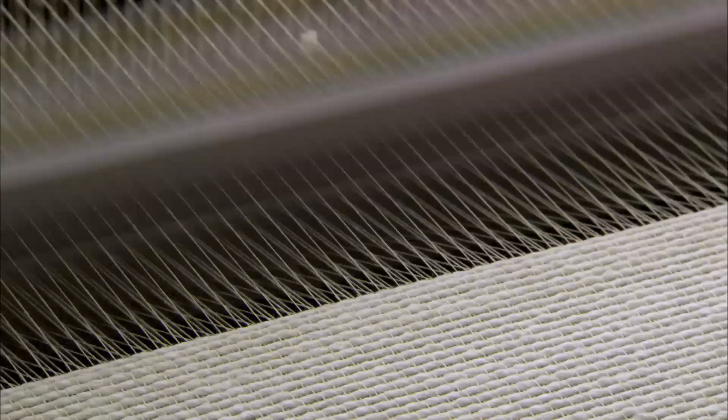Ever look really closely at the fabric on your sleeve? See the pattern, the weave, and the texture. The high-speed loom does it all.

Look over your shoulder. A silent spy may be tracking you. The micro drone has moved up from amateur to professional.

It's a monster lumberjack. Grab, slice, and stack a bunch at a time. Meet the Feller Buncher. A low-level rescue flight over water, rocks, and land.

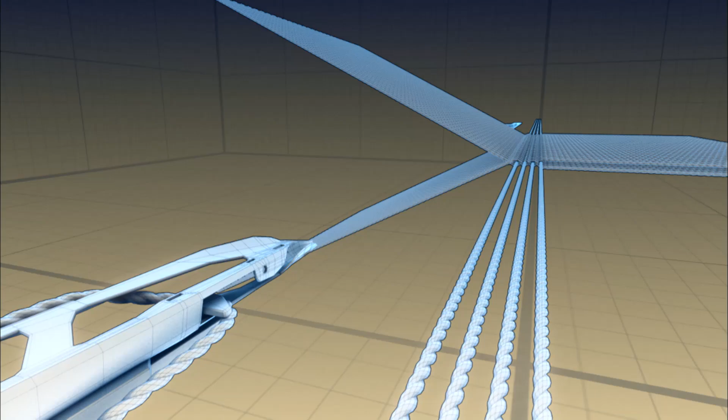Speed, turn, stop on command. It's the sports car of hovercrafts. Let's look inside these machines and see how they work.

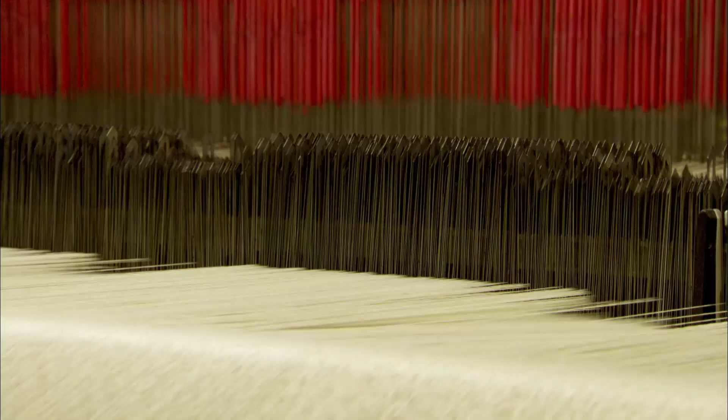Weaving has been around since the early Stone Age. The basic concept hasn't changed, but speed and sophistication sure have. To keep us all in clothes and bed sheets, we need millions of kilometers of fabric every year. Impossible without the industrial loom.

High-speed machines all over the world, like these outside Leeds, England, produce just about anything we need and want. Let's see how they work.

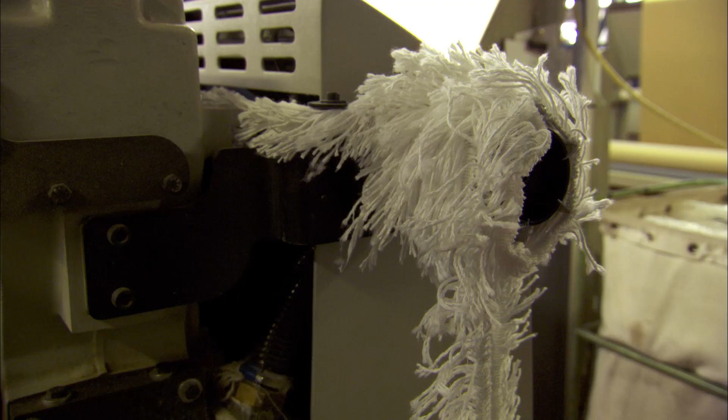First up, the basics. Take 2 sets of threads. The first is called the warp, 2 rows stretched lengthwise. The second set is called the weft, and it goes back and forth between the warp. Every time it goes through, the warp moves to trap the weft.

The threads are now becoming a piece of fabric. To keep it from unraveling, a reed pushes the threads together. And then, the whole process starts again.

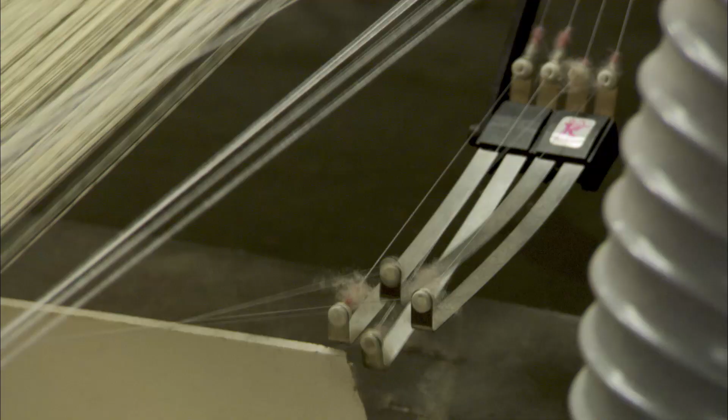To mass produce a wide range of fabrics, you need to organize thousands of different threads. So the loom needs a lot of control, and it gets it from these devices called heddles. Each one has an eye through which individual warps are threaded. This gives the machine control of thread movement.

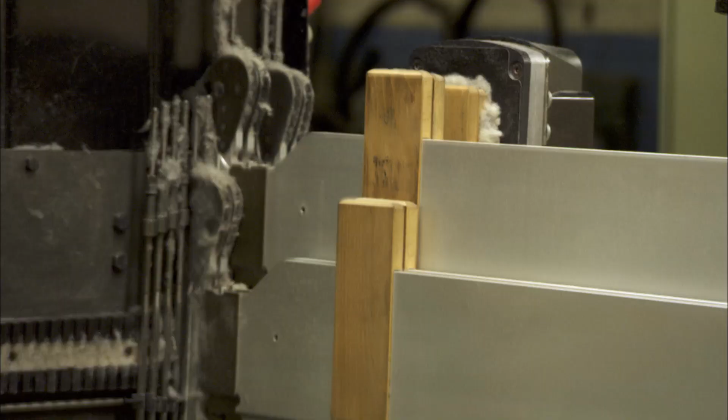Heddles are suspended on the loom's shafts, located here. When a shaft is raised, the heddles go up and the threads with them. To create simple patterns on one of these, you need a few hundred heddles and 2 shafts moving up and down together.

Industrial looms have thousands of heddles and up to 24 shafts, all moving independently. That takes care of control. Now let's see how speed works on this machine.

To manufacture massive amounts of fabric in a cost-effective manner, the loom needs to rocket the weft through the warp. Old-style looms use a shuttle, a spool of thread that unravels as it moves manually back and forth. Reliable, but slow and in constant need of reloads.

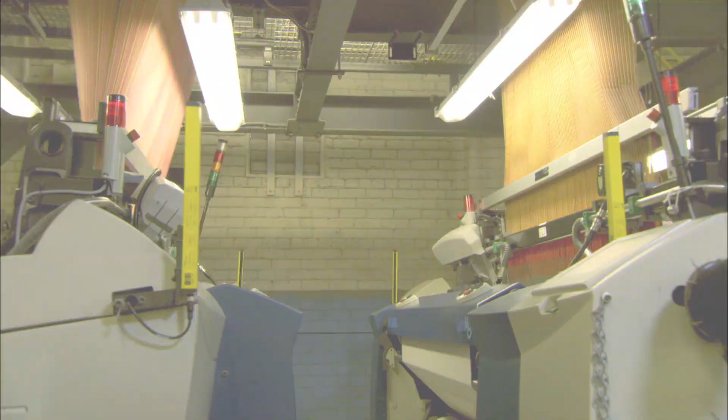This presents 2 challenges for the modern loom: how to weave thread quickly without a shuttle and spool, and how to minimize thread reloading. Enter the rapiers, one of the latest shuttle replacements.

One rapier picks up a piece of thread, pulls it to the middle of the warp, and hands it off to its partner. It pulls the thread the rest of the way, while the first goes back for another strand. And because spools no longer have to travel back and forth, the rapiers draw thread from large bobbins.

That means a lot fewer pauses for reloading, and this dramatically improves the machine's productivity. On the industrial loom, this handoff happens over 1,000 times a minute.

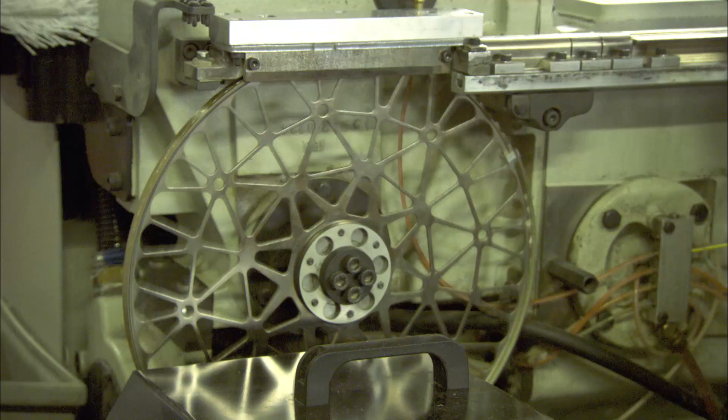This speed puts tremendous strain on thread snatched off bobbins at up to 250 kilometers per hour. If it breaks, the machine shuts down, and that costs money.

So experts came up with a pre-winder, a device that preps thread for the rapier. It's a buffer that eliminates thread-breaking tension on the machine.

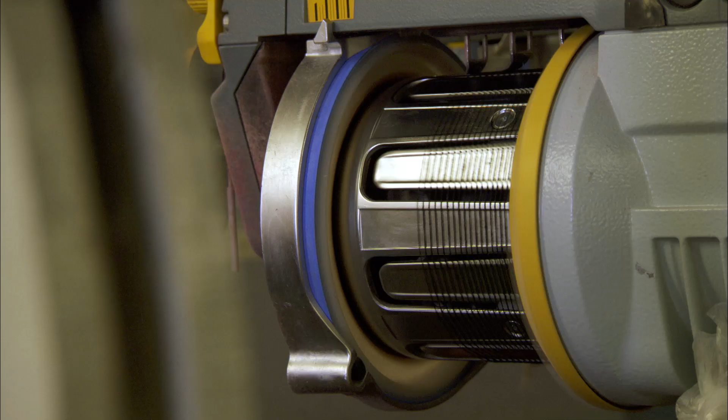Another side effect of speed is fabric dust, and to protect workers, it's got to go. Ceiling-mounted vacuums suck up the entire volume of air from the shop every 2 minutes.

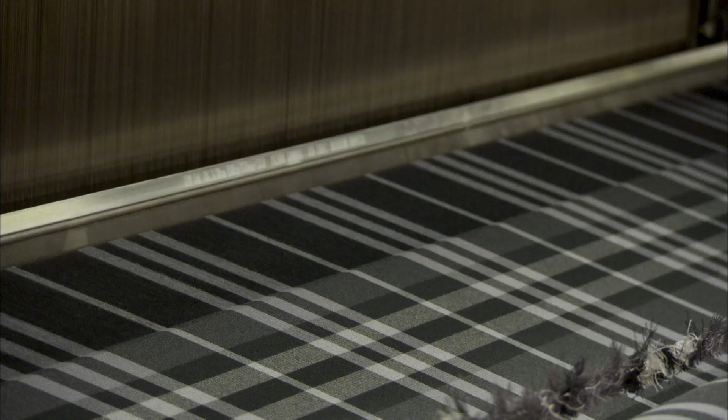Okay, the loom is lightning fast, but how does it create different patterns and textures? A geometric pattern, like this plaid, starts with loading the warp with rows of different colored thread. Send a dark thread through the colored rows, you get this. Send a light thread across, you get this.

The trick is switching between colors on the fly, and for that, it needs a weft presenter, a component that selects different colors from bobbins and hands them off to the rapiers while they work.

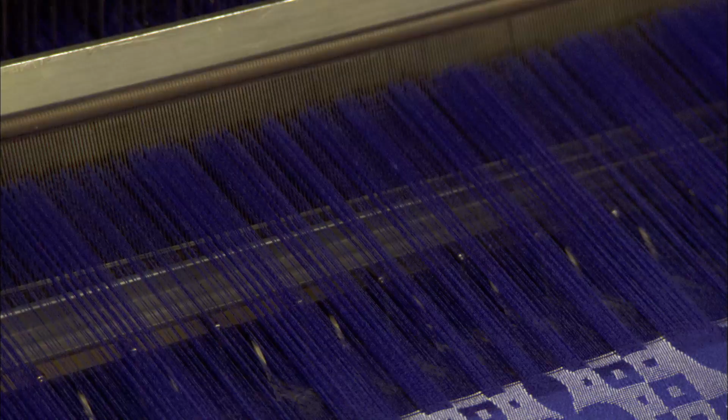For complex patterns, a loom with a jacquard attachment is required. It's a mechanical wonder. The jacquard device controls all the threads loaded into the machine. Instead of ganging them together onto the shafts of a standard loom, every strand has its own control system. So, with a jacquard attachment, operators can control the paths of each thread into ornate designs.

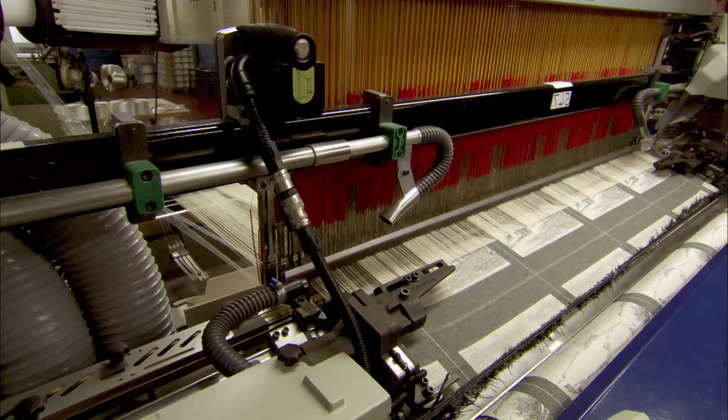Instructions are sent to each individual thread as it races through thousands of weaves. All those tiny decisions add up to a pattern, kind of like how a bunch of pixels become a picture.

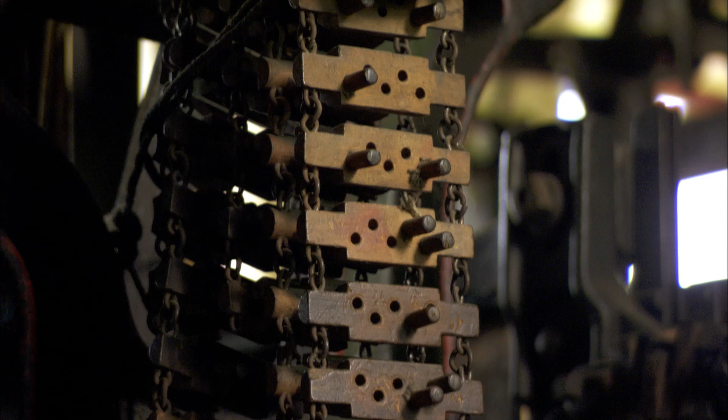Its namesake, Joseph Marie Jacquard, invented the first of these mechanical marvels in 1801. Until then, this kind of work had to be done by hand and was extremely expensive. His machine used punch cards to control individual threads, and some consider it the first computer ever built.

Which is exactly how its modern descendant works, only electronically. Designs and patterns are programmed into the machine, and away it goes.

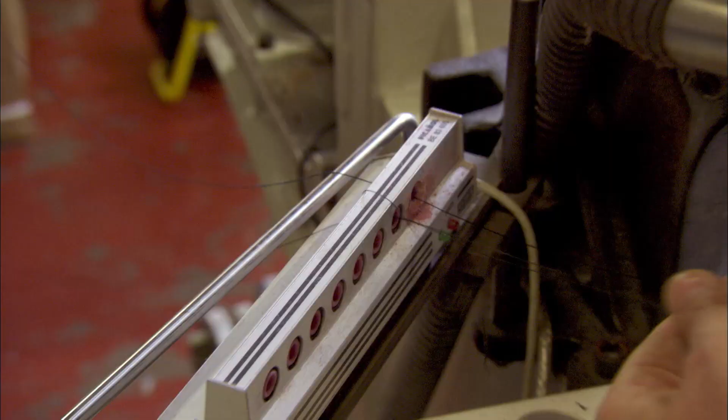The threading of a jacquard loom is so labor-intensive, it's usually done just once. When it's time to change colors, new threads are tied on to the existing ones. Even for a small loom with only a few thousand ends, the process can take days.

Without these fabric workhorses, the cost of a single suit would leave most of us in last year's deerskin. The loom's a machine to be thankful for. It literally puts the clothes on your back.

This is a hovering, unmanned aerial vehicle. The micro-drone MD4-200.

Drones like this one are used for jobs like aerial mapping, fire inspection, law enforcement, surveillance, and search and rescue. Weighing less than a kilogram, its onboard camera records from a height of 150 meters.

It's an eye in the sky that saves money and lives. Let's see how it works. The MD4 flies with the help of 4 fixed-pitch rotors, each attached to an electric motor. You start it up, spin the blades, and up it goes.

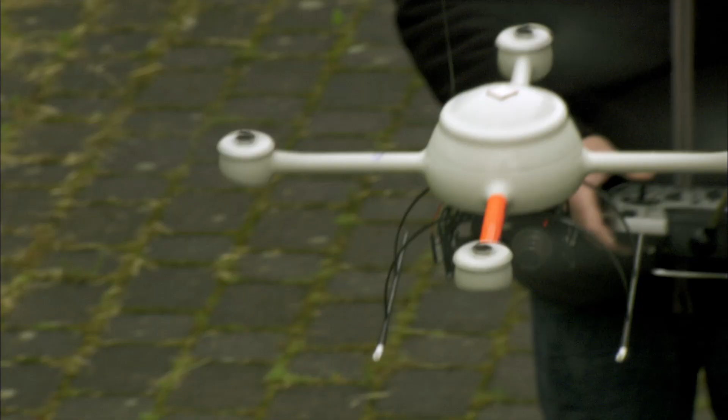The design challenge is to keep the craft super light and whisper quiet, airborne and stable, all while transporting an HD camera. And to avoid losing it, program it to come home on its own when low on power, and land safely. When you tip the scales at less than a kilo, you don't need a big engine. That means less energy to fly and hardly any noise.

To keep it light, designers chose carbon fiber for the MD4's body. A material born in the lab, made up of thin threads of carbon atoms in a hexagonal pattern. Weave it into fabric, create lightweight material with tons of strength.

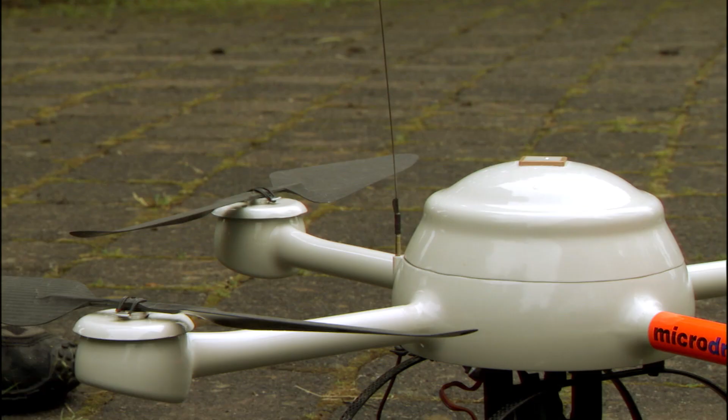Small brushless motors give the machine lift. All electric, without gears, the motors have more than enough power to fly the MD4. The 4-rotor platform keeps a horizontal and stable base in balance for taking pictures.

That's the good news. But flying a quad rotor isn't like working a plane or a helicopter. 4 rotors means 4 sources of thrust, each needing constant adjustment.

The motors are independently controlled by microprocessors that send and receive hundreds of signals to onboard sensors. The operator talks with the drone through a controller, sending FM radio signals that the MD4 converts into movement.

To get a rock-steady hover, 2 rotors spin in one direction, the other 2 in the opposite. The 2 sets of rotors cancel each other out and keep the machine in a static position. If you drop the speed of one pair of rotors, the torque of the other 2 force the drone to spin.

For a straight run, drop the speed of one rotor, which causes the leading edge to dip. Then you bump up power on the back rotor, and away you go.

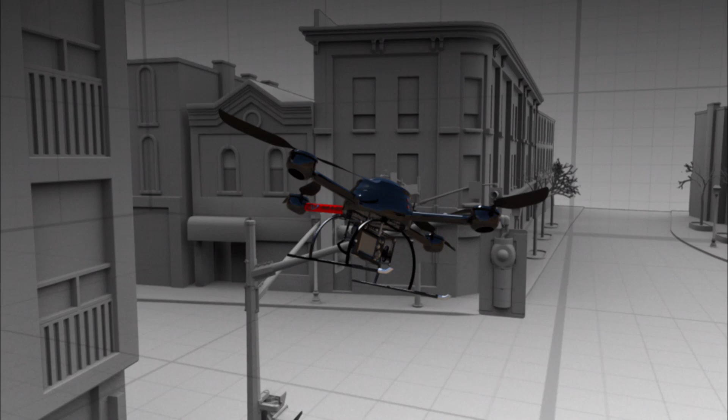The machine gets all its power from a small rechargeable lithium battery, enough juice to keep it working for about 30 minutes.

If the battery runs low during flight, sensors give the drone a pre-programmed flight plan to land it safely close to the operator, who just pops in a new one and sends it up again.

And if the MD4 loses radio contact, onboard GPS puts the drone in park to wait for its master. If it doesn't pick up a signal in 30 seconds, it makes an emergency landing automatically. The GPS also allows a user to switch to autopilot for flying the machine on a predetermined route.

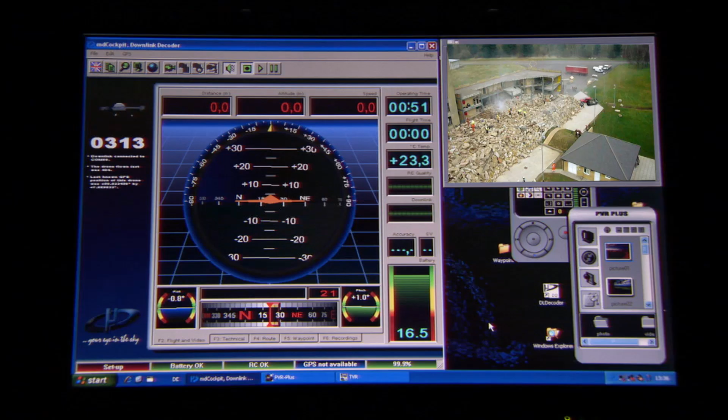These firefighters in Birmingham, England, use the MD4 to find deadly hotspots. Cops and security patrols sneak up on bad guys. And it inspects hard-to-get places for hydro crews.

Flying around in silence with the latest cameras. It's a stable, floating platform for taking pictures, thanks to the quadcopter design that keeps the shot steady for as long as the batteries allow.

If you're a softwood tree, between the ages of 50 and 80, live on a farm, and this machine shows up on your doorstep, you're in for a bad day.

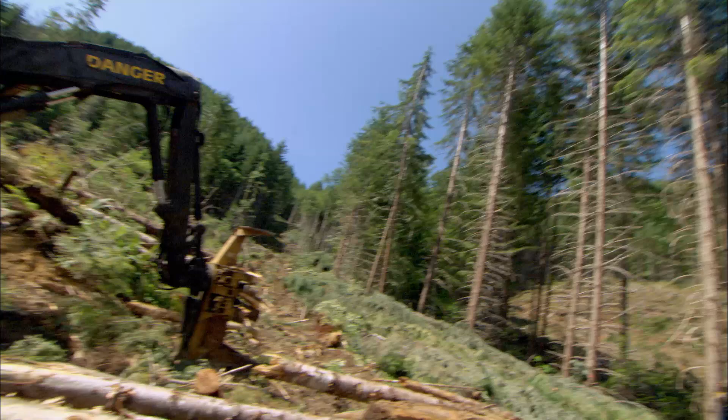This is a feller buncher, a machine that revolutionized the lumber industry. And chances are, it cut down the wood that built your house and made your morning paper.

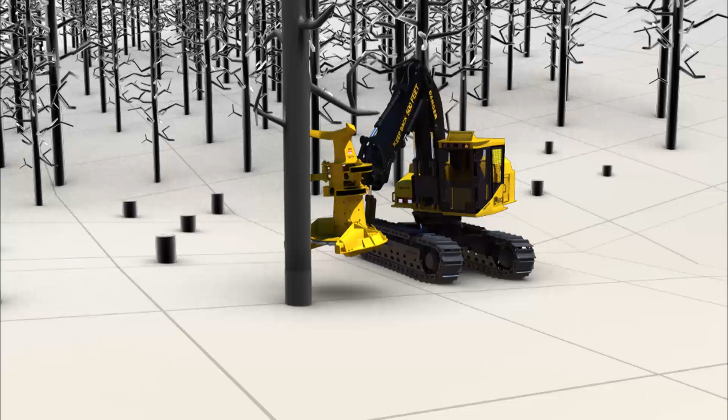It does the work of dozens of men, cutting up to 4,000 trees in a single day. One of these machines can clear about 100 football fields worth of trees in a week. All with the flick of a joystick.

Let's see how it works. The feller buncher has 2 simple jobs: felling and bunching.

Cut trees with a big saw, pick them up with a long, powerful arm, and set them down gently.

First up, the blade. The feller uses a high-speed disc saw with indents to carry away wood chips, and teeth that are wider than the disc. If disc and teeth were the same width, pressure from the tree would sandwich the blade and the whole thing would grind to a halt.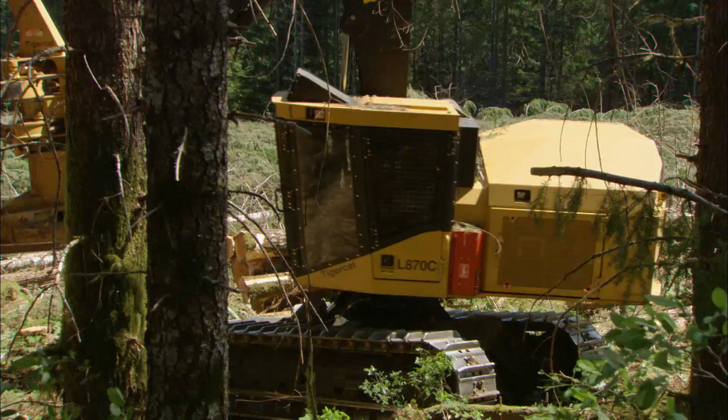The teeth are made from carbide, a super strong alloy, strong enough to rip through a half meter of dense, resin-soaked trees. The teeth cut through fibers inside the tree with these points, then rip out the weak middle section.

As the tree is cut, it slides onto this holding plate. Without it, the tree's weight would freeze the disc and burn out its motor.

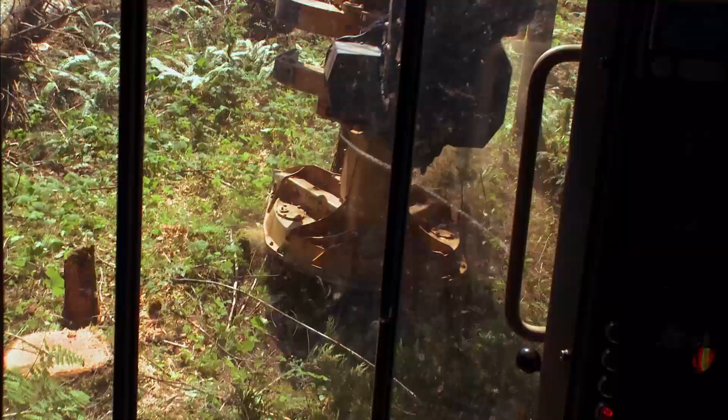Another great advantage of this machine is how low to the ground it can cut. Leaving behind big stumps wastes a lot of wood. And cutting low is more about reach than bite.

Which brings us to the bunching part of this machine and its powerful hydraulic boom. The feller buncher needs distance from the trees to give its operator a clear view for a level cut, and to keep him and the machine out of harm's way.

For that, you need a hydraulic arm that's strong enough to pick up and set down a 5-ton tree from 8 meters away.

The hydraulic arm has 2 sections, the stick boom and the main boom. Getting these to work together is the key to success out here. With a single joystick, the operator moves and adjusts the boom's 2 sections to land in the right spot and make the perfect cut.

Okay, you're through the tree. Why not just yell timber, let it go? Falling trees damage other trees. They're extremely dangerous. And out here, to be efficient, you need the wood out of the way.

And neatly stacked for transport. To do all that, you need the hydraulic boom and its claws to be powerful, and you need a body that's not going to tip over.

This machine's strong enough to grab several trees at once. After cutting, the operator closes the accumulator and hangs on while opening these clamp arms. When a second tree is cut, the accumulator arms are sandwiched between the two.

A double-hinged joint allows it to slip free and grab the harvest, while the claw is free to grab the next tree.

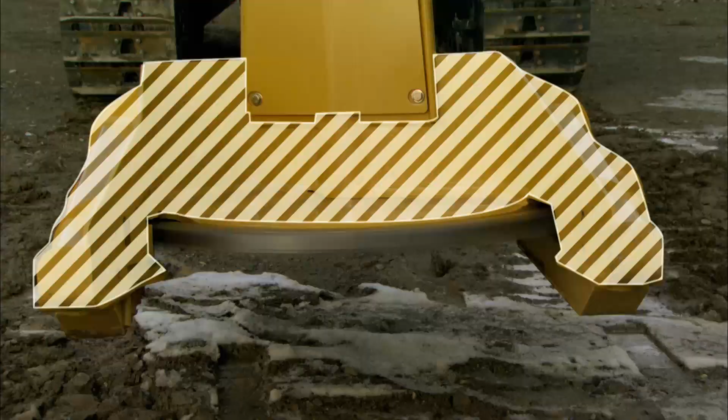Meanwhile, these special ends, called snouts, keep the blade from accidentally picking up forest debris and sending it flying off in all directions. As the claw grabs, the machine stabilizes itself.

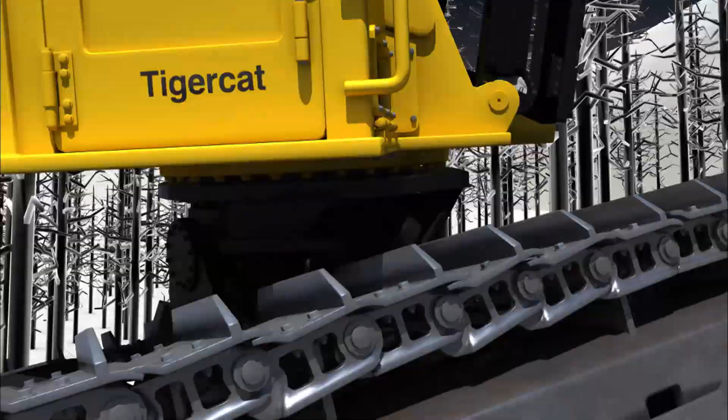It floats on a leveling system that allows the machine to bob and weave on a series of hydraulic cylinders. It's kind of wrestling with the tree as it picks it up and sets it down.

With a pivot point near the cab, most of the weight is back here. A great counterbalance to keep the whole operation upright.

This self-leveling machine operates on slopes up to 45 degrees. Handy when you're working the side of a mountain.

Its tracks provide a great grip without wrecking the forest floor. So tree farms like this one can be replanted.

The machine's 31 tons are evenly distributed over 6.5 square meters. At any point, its heaviest impact is less than 0.5 kilograms per square centimeter. That's less than the pressure you put on the ground as you walk.

When the feller buncher arrived on the logging scene in the 70s, it changed the industry forever. The old-style lumberjack is a dinosaur now, and a machine that looks like one replaced him.

You're flying over rocks, river currents, and land without a hitch. It's what hovercrafts do. The HoverTech Rescue Craft is an emergency vehicle working some rough waters in Canada's Fraser Valley.

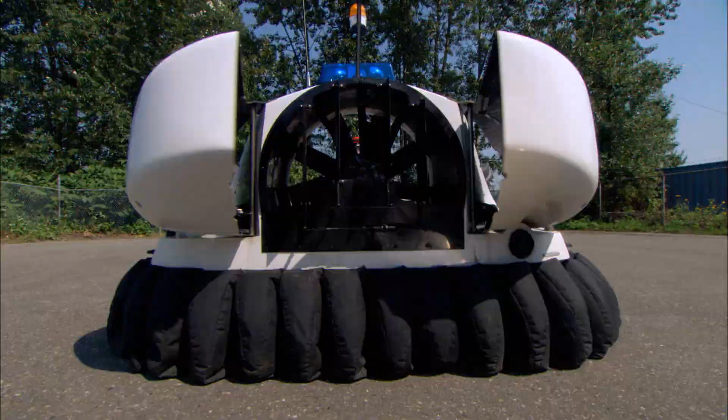When a call comes in, it's got to unload fast and launch in seconds from almost anywhere. Designers gave this machine just one fan and one motor. And that's a hovercraft rule breaker.

A traditional hover has separate fans and motors, one for lift, one for thrust. To keep it compact and light, this machine's single engine does both.

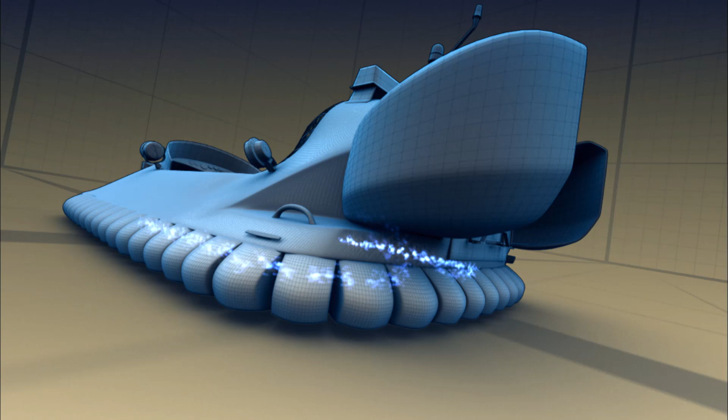Here's how it works. When you start up, the fan blows air into an airbag or skirt made from heavy-duty nylon. Air pressure builds up to the point it has to escape, and the only way out is to push the whole thing up and blast out under the skirt's pockets. You're up and floating on a cushion of air.

But you can't go forward on lift alone. At this moment, other hovercrafts need a second fan to move forward. That's because they don't have this.

A splitter that divides the fan's air, directing enough downward for lift, while sending the rest out the back for thrust.

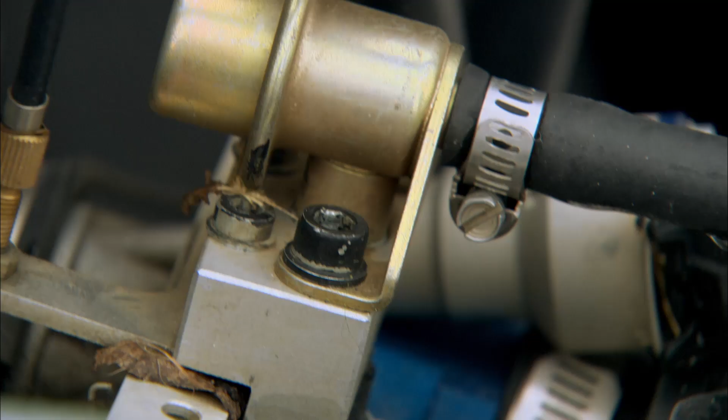When you're riding on air, there's not much friction. So all this machine needs is a 65 horsepower engine to hit a top speed of 70 kilometers per hour.

You can go just as fast on a boat like this, but you have to push water out of the way and burn a lot more gas doing it. With a hover, you're more aircraft than boat.

No current or tide can touch you. Transitioning onto land is no problem. The flexible skirt, made of individual air pockets, moves up and down with the terrain. And if one of its pockets rips, the one beside it fills the gap.

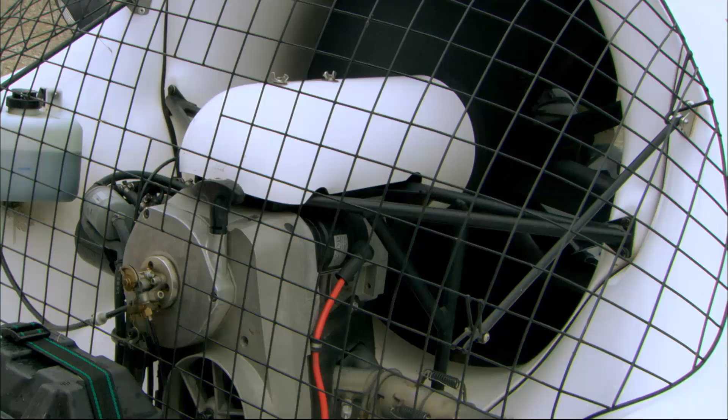A traditional hovercraft can shut its thruster fan and float on its lift fans, but with just one, it's kind of tricky. Kill that fan at full speed, you lose thrust, lift, and slam into the water.

Here's the workaround, an idea borrowed from reverse thrusters in fighter jets. These buckets swivel into the blasting air and redirect it forward. Reverse thrust, so no loss of lift or control. The buckets provide pinpoint control when approaching a target.

Once in position, killing the fan lowers the deck closer to water. A high-density foam shell keeps it floating while this guy climbs aboard.

When it's time to go, adjust the buckets to balance thrust while the fan gets up to full power. Then spin the buckets and away you go.

Designers broke a few rules making this hovercraft portable and fast enough for search and rescue work. Pretty handy for guys on call 24/7. Part boat, part plane, the Hovertrek gets to the scene fast in a business where every second counts.

The latest trams generate electricity while braking and send it up the line to help power trams behind it.

Flying a helicopter is a delicate balancing act between two rotors. But hauling tonnage and catching crooks takes a special breed.

It looks like it can read our thoughts and predict our moves. The science behind the Segway transporter.

This 3D printer is a real-world replicator. Feed it pictures, it manufactures objects in 3 dimensions. Let's take the lid off these machines and see how they work.

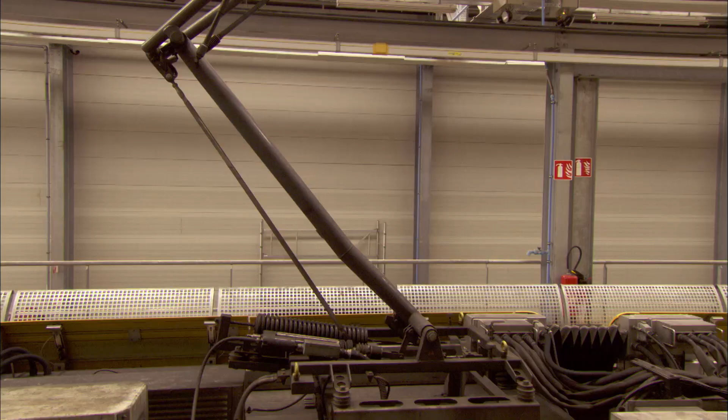Depending where you're from, this is a tram, a trolley, or a streetcar. Whatever you call it, the urban railway is making a comeback. At one time, almost all city transit ran on rails. But then, buses and cars took over. New technology, no emissions, and ease of installation has given this form of mass transit a new lease on life.

Trams run on electricity, and the latest versions can actually generate some of their own power. Let's see how they work.

Choosing low-emission trams over gas and diesel power is great for PR and government pocketbooks. But for this ride to appeal to the masses, you need more than that. To be number one in the public eye, you have to be efficient, reliable, and comfortable.

Let's start with efficiency. Compared to other forms of mass transit like buses, trams need a lot less energy and maintenance. Their electric motors are more powerful, quieter, and efficient than their gas-guzzling cousins.

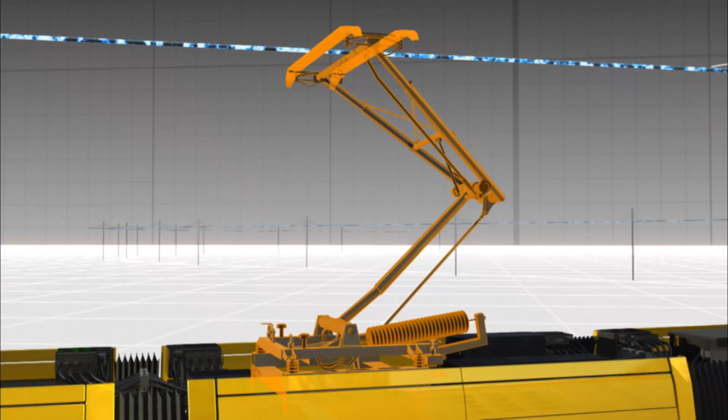Trams get power from overhead lines fed by the local grid through something called a pantograph. It draws electrical current through points of contact. Early versions of this device had a problem. Constant rubbing from overhead wires wore out contacts and cut off power. Now, overhead lines are laid out in a zigzag pattern, so the pantograph slides side to side while the tram is in motion, greatly extending the life of its contacts.

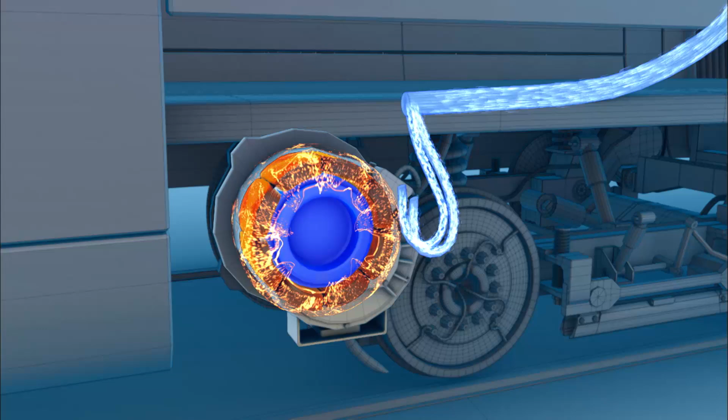Electricity flows from the wires to copper coils inside the motors. This creates a magnetic field that spins a magnet, and with it, the wheels. This machine can top 100 kilometers an hour, but rarely goes above 70 while working in cities. And that means it needs good brakes.

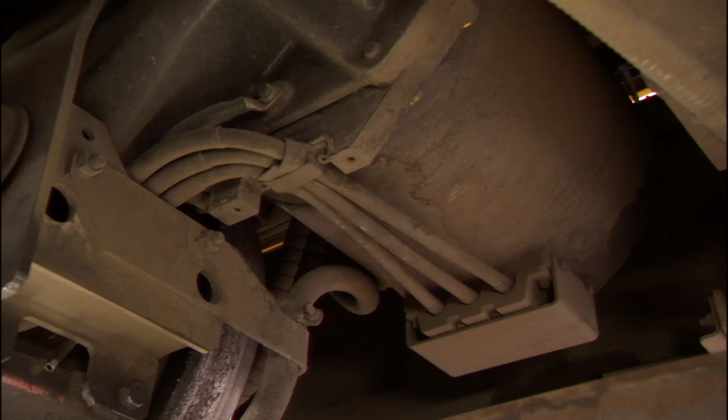But these ones aren't just for stopping. They also help feed electricity back into the system, a design feature that can save big on a city's power bills. When the machine needs to stop, the power is cut off to the motors, but the tram's momentum keeps the wheels spinning. And this allows the motors to generate power.

It's called regenerative braking. The momentum spinning inside the motor creates an electric current that's sent back up through the machine, through its pantograph, along the overhead wire, and into the nearest tram.

An electrical piggyback ride. If the tram needs to stop in a hurry, it's also got sets of air brakes. In an emergency, say if something falls in front of the tram, the brakes all work together with a safety bar to prevent anything from getting stuck under the machine.

Step 2 in winning over the public is reliability, and that means not breaking down. With no transmission, no potholes to deal with, no tires to go flat, and no fuel to run out of, the only thing that really threatens this ride is a power failure. Trams like these cost a lot more to purchase than buses, but they last decades longer and cost much less to run day-to-day.

Coming across as good for the environment and city bank accounts is fine, but it doesn't explain why the average person prefers light rail to buses. For that, you need to look at this machine's third advantage: comfort and style. New models come with street-level ground clearance for easy on and off.

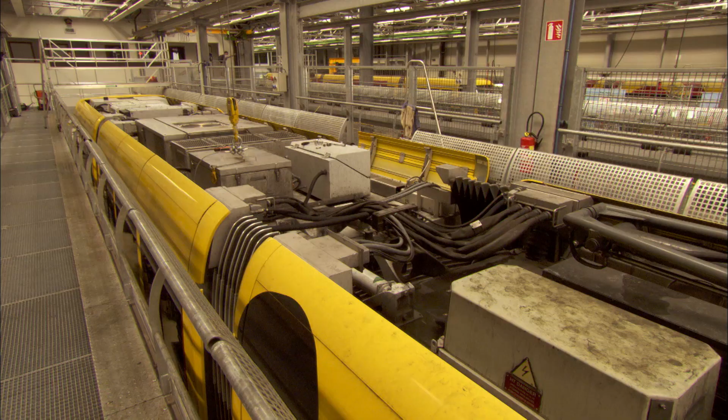They can grow with extra cars to give plenty of rush hour elbow room. And with steel wheels that can be kept true, the ride is super smooth. The low ride comes courtesy of a design that hides most of the tram's components on the roof, giving the wheels and axles plenty of room to provide support.

Super strong pivot points seamlessly join the cars together and enable these machines to take on up to 7 cars and still slide through corners. Accordion-like rubberized material fills in the gaps around the joints between the cars. It's rush hour, and now you have transit that's easy to board with continuous open space for over 200 passengers.

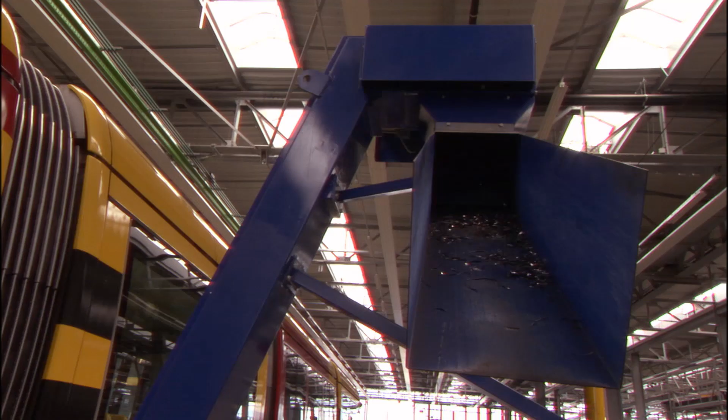Keeping a ride smooth has always been a challenge for machines that depend on steel wheels riding steel rails. The wheels wear out fast, especially under a tram that has an empty weight of over 40 tons. So every 20,000 kilometers, they get a tune-up with a diamond-tipped truing machine. This big robot shaves off 0.5 millimeter thick strips until the wheel is perfectly clean and level. It guarantees a smooth ride and reduces friction, saving big on electricity.

Fast, smooth, and cheap to run. With cities increasingly building more right-of-ways for the tram, the other options are looking a little older every day.

Helicopters are hard at work all over the place these days. With great speed, range, and a lifting capacity of over a ton, machines like Eurocopter's Twin Star and B3 are fast enough to work for police, strong enough to haul for utility companies, and nimble enough to work in tight places without going down. These pilots make it look easy, but flying a helicopter is anything but.

Picture balancing on a large ball with a machine that weighs over a ton. To fly one of these, you have to control the 3 dimensions of pitch, roll, and yaw. Let's see how it works. An engine spins a rotor, the rotor spins blades, and up you go.

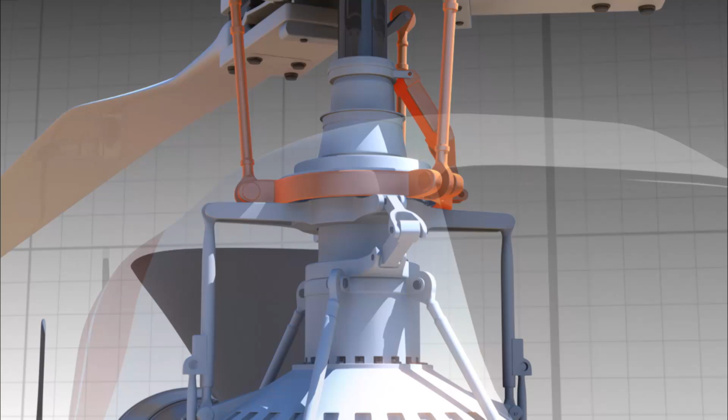A helicopter is an assembly of thousands of loose pieces trying to fly in formation. Getting them to work together to create the most versatile flyer in existence is the hard part. The first challenge is to create lift. The second is to control it. And the third is to keep it from crashing if the engine fails.

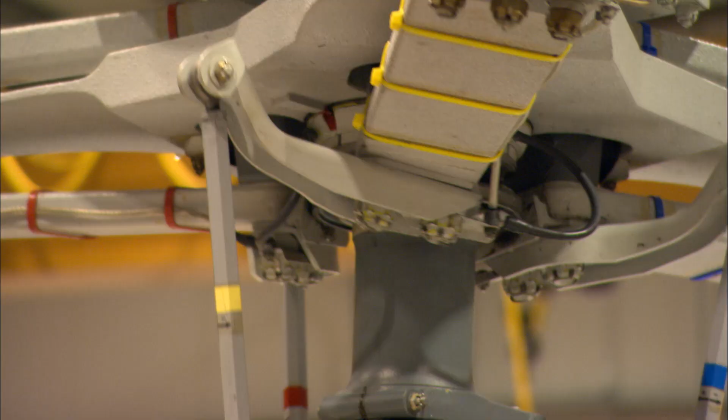First up, lift. The blades of a helicopter's main rotor are basically wings that slice through the air. They're shaped like the airfoils of an airplane wing, but these are much thinner and narrower because they have to spin extremely fast to get airborne. To do that, they need a slight shift. This change in the blade's angle of attack, combined with their speed, forces air down. When the amount of air forced down overcomes the weight of the machine, it takes off.

Helicopter blades need heavy air to create lift. The higher you go, the less air pressure there is, and the harder it is to climb.

On to challenge number 2, control. Spinning the main rotor this fast is terrific, but it comes with problems. For starters, the body of the helicopter wants to spin in the opposite direction of the rotor. To control the machine, a precisely located counterforce is needed for balanced flight, and on a chopper, that comes from the tail rotor. On this machine, it's 1/6 the size of the main rotor, so it spins 6 times faster to balance the force from the big blades.

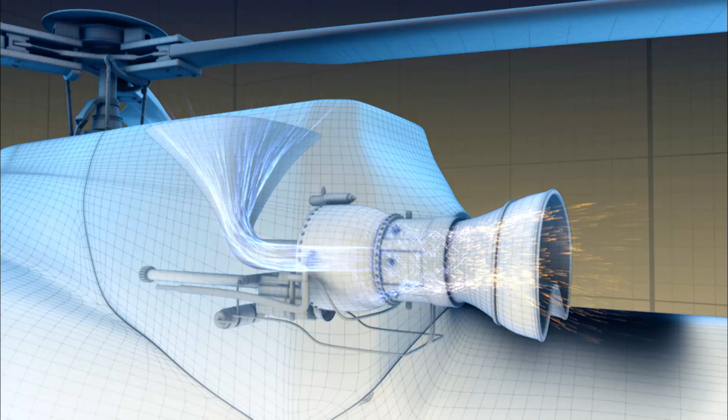The power for all this spinning comes from a high-performance engine that sucks oxygen into a combustion chamber to burn jet fuel. This produces super hot exhaust gases that drive a turbine.

And it turns drive shafts that connect to the main and tail rotors. The drive shafts are linked through gears to a transmission that keeps everything in perfect sync. So now you've got basic control of a powerful flying machine.

Let's take a closer look at some of the finer elements of helicopter handling. A twist throttle controls the engine power to the main and tail rotors. Once airborne, the rotors spin at a fixed RPM all the way. Pilots never hit the gas to go higher, faster, or to change direction. The fixed RPM is set to maintain perfect balance between the two rotors.

A helicopter's ability to fly in three dimensions is all about the blades and their angle of attack. And that's controlled with the collective and the cyclic. They allow pilots to change course, altitude, and speed.

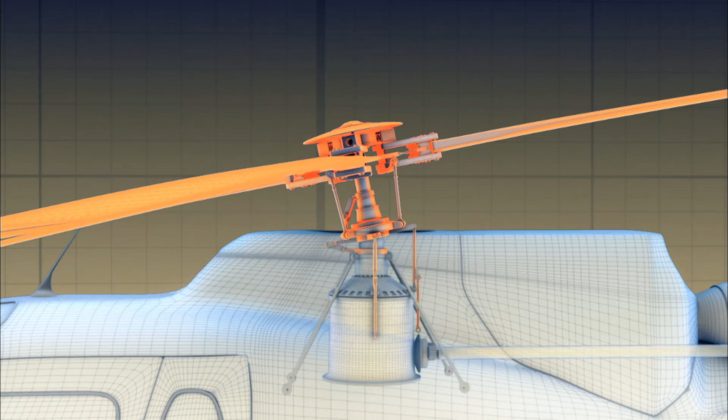The cyclic is the control directly in front of the pilot, which he uses to move left or right or to go forward or back. When you push the cyclic forward, the angle of the blades increases at the back and stays low at the front. This creates an imbalance of thrust and propels the craft forward. Same thing happens when you push the cyclic to the side. You get an imbalance of thrust and move sideways.

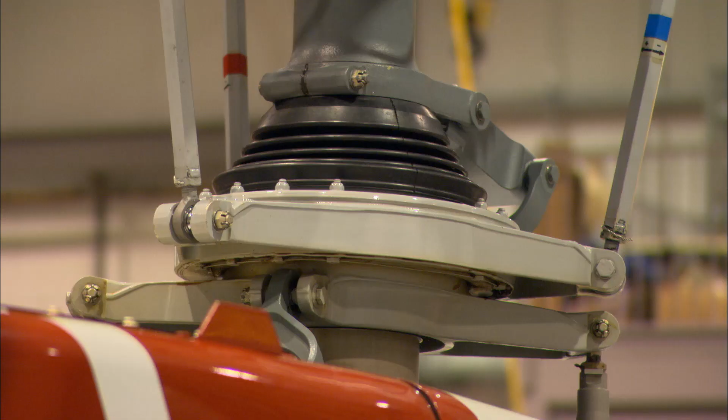Collective, stick, foot pedals. A very delicate balancing act that keeps everything from spinning out of control.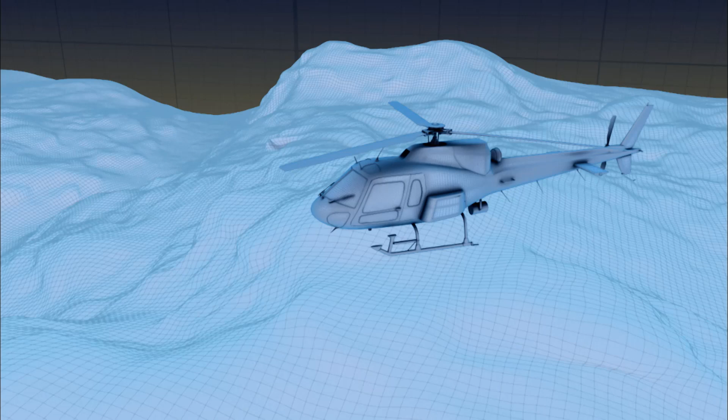On to the third challenge: staying in the air when something goes wrong. What happens if the engine suddenly conks out? If you figure it just drops like a stone, you'd be wrong. To fly one of these things, you gotta learn to land it when the engine quits. And they pull that off with auto rotation. If they lose power, pilots let the main rotor spin freely. The blades are flattened out to catch max air, and this usually provides enough control to glide safely to the ground.

Remember the thousands of parts bit? Well, some are more important than others. If you lose your connection with the blades, you're gonna drop like a stone. There's no backup plan for this malfunction. On helicopters, that comes down to some very important nuts, the main thing keeping the blades attached to the machine. But losing them is never a problem on well-maintained machines like these.

When you put a great helicopter in the hands of a crack pilot, there's nothing to fear. Just enjoy the ride on the most maneuverable flying machine in the world.

Since its unveiling in 2001, the Segway has captured our imagination and pointed to the future of transportation. That's because this machine seems intelligent, impossibly keeping us balanced while mysteriously reading our intentions when we want to move, stop, and turn.

No, it's not magic. But that doesn't take away from the cool stuff that goes on inside when you ride this thing. Let's see how it works.

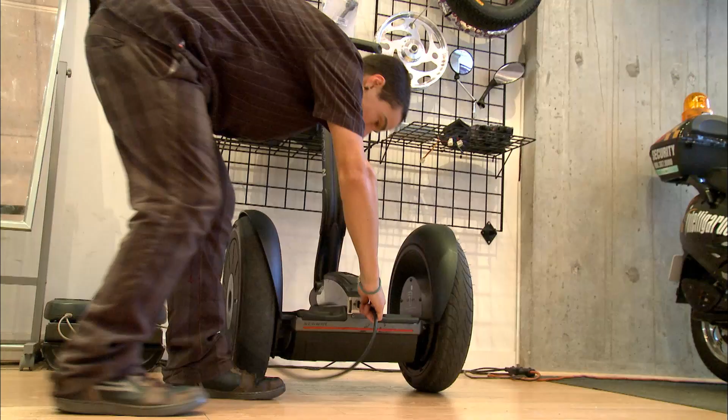The Segway is an electric scooter with lateral wheels, so it's a machine that has to copy what we bipedal humans do and learn to stay in balance. As you lean forward, gravity wants to take you down. And it would, except the Segway's wheels automatically pick up speed to keep the platform beneath you. Same goes for reverse: lean back, and that's where you go. The wheels have to spin in that direction to keep you from hitting the ground.

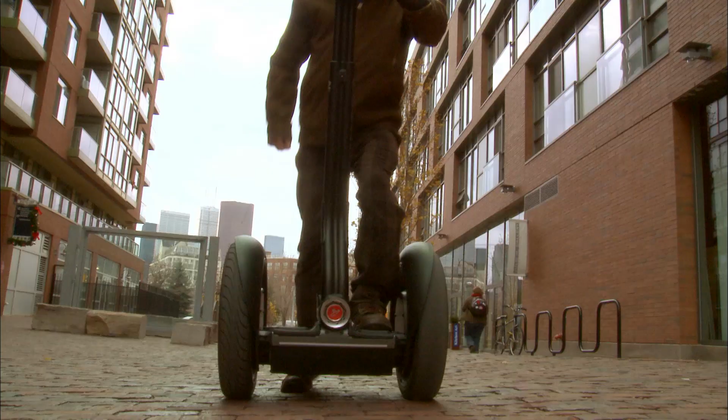So, from the moment you step on the Segway to the moment you get off, you're basically falling. Even when keeping it stationary, you're really falling forward one moment, backward the next. The wheels keep catching you before you hit the ground. Balance and movement are the same thing on this machine.

So how do the wheels know what to do? To help keep us upright, the human machine comes with legs, muscles, and a brain. Same goes for the Segway, in the form of wheels, motors, and a really clever little box that's crammed with sensitive measuring devices.

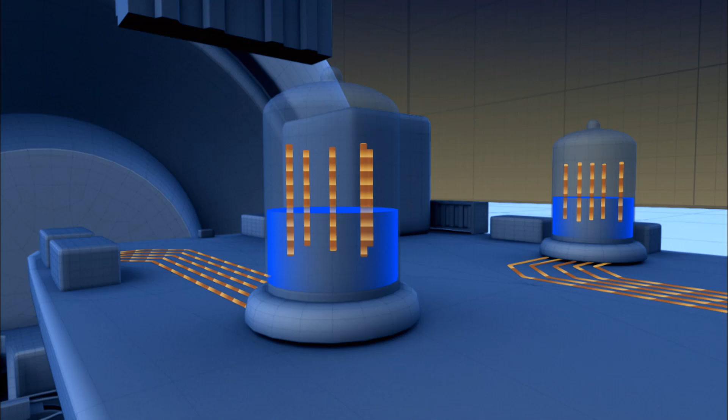5 angular rate sensors detect changes in direction and speed, and tilt sensors detect angles. They work the same as a carpenter's level, except the liquid inside conducts an electrical signal. Together, these sensors provide data that allow the machine to determine if you're about to tip over.

It sends the commands to the wheels and keeps you upright. No matter which way you lean, they're always one step ahead of you. The Segway has 10 microprocessors, giving it about 3 times the brain power of a typical PC. You can't outsmart this machine.

To turn, push the control stick to one side. This decreases power to the inside wheel, spins the outside one faster, and round you go.

Segways have a carrying capacity of up to 118 kilograms. Each wheel comes with its own 2-horsepower emission-free electric motor. Gearboxes inside the wheel assembly step down the motor's RPM for smooth control and a distinctive whirring sound.

The gears also help limit the Segway's speed to about 20 kilometers per hour. But even at that rate, you'd do some damage if something went wrong and you flew over the handlebars. So the machine comes with backup systems that shut it down safely if there's a glitch. There's no tumbling off this guy.

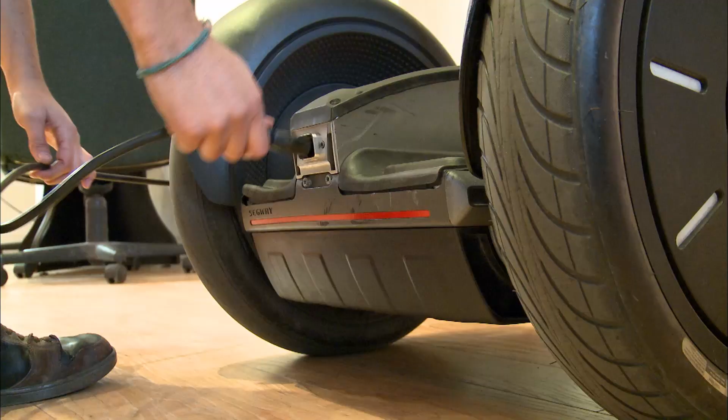When you're done for the day, just ride over to a wall socket, plug it in, and in no time it's ready to ride again. And these days, that includes everything from off-road trail riding to making a day of foot patrols a little smoother for police. This machine may not rule our sidewalks yet, but it's finding a way into our transport systems one lean at a time.

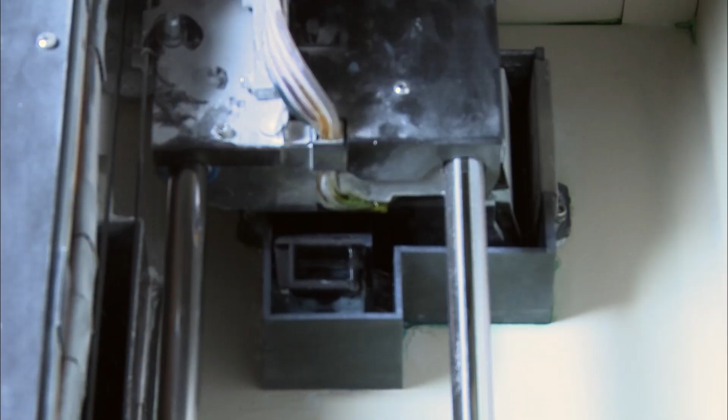This is the Z Corp Spectrum Z510. It's technically called a 3D printer, but we're going to call it a replicator. This machine that looks like a photocopier prints objects in 3 dimensions. Simply upload a digital picture to get a solid object up to a cubic foot in size. Let's see how it works.

This machine makes anything, from action figures, architectural models, inventions, even a prototype running shoe. And they all come from exclusive design software that speaks the printer's language. In this case, an online gamer wants to take his action figure from virtual to real.

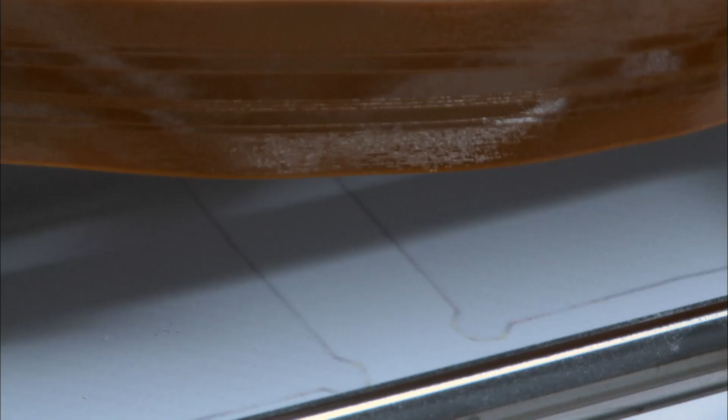To start, feed the printer with a digital 3D file. The printer's processor dissects the 3D image like a CAT scan, slicing it into super thin layers, about 1/10 of a millimeter each, close to the width of a human hair. The shape of each virtual slice is translated into mathematical coordinates and plotted out, a bit like how GPS uses math to build virtual maps.

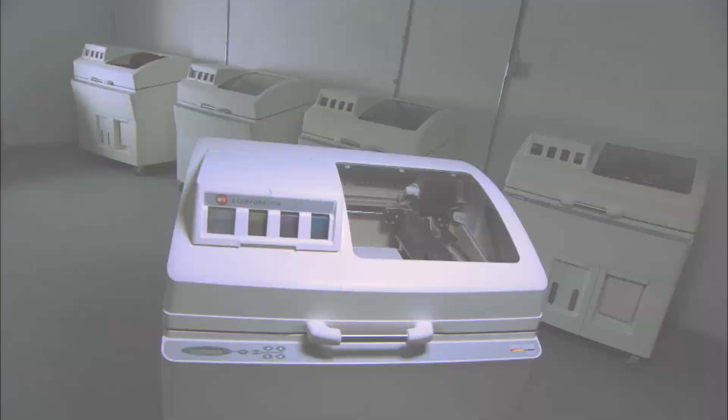Once the design is loaded and analyzed by the printer, the replicating can begin. A roller moves a thin layer of powder from a feed bin into the printer's build chamber. The powder is a mix of plaster compounds that have to be of a certain hardness and elasticity. When dry, it has the consistency of talcum powder.

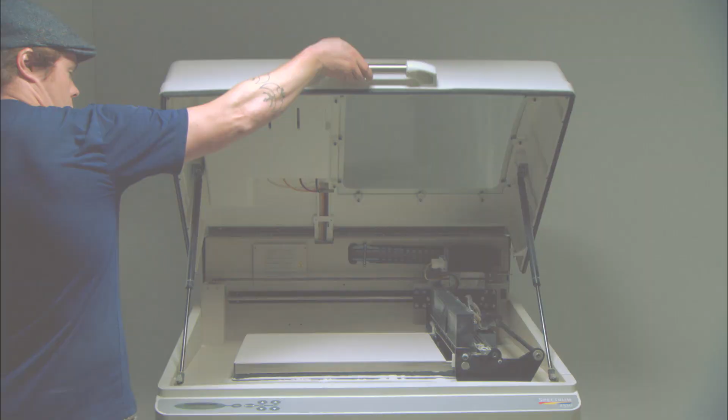Once the first layer of powder is laid down, the print heads go into action. They lay down color ink onto the first layer according to the object's coordinates. But this machine doesn't just lay down ink. To build in 3 dimensions, it needs an adhesive or binder fluid to start the foundation for the final object.

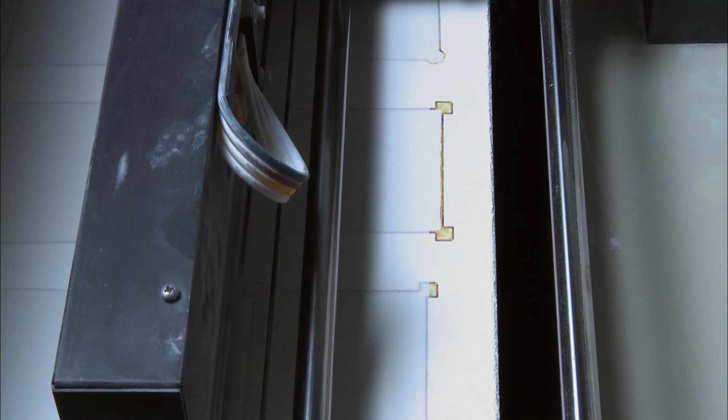Layer after layer, they're glued together. The build chamber lowers with each pass, and the next thin layer of powder is added, ready for more ink and more adhesive. This continues 1 layer at a time until the entire model is complete.

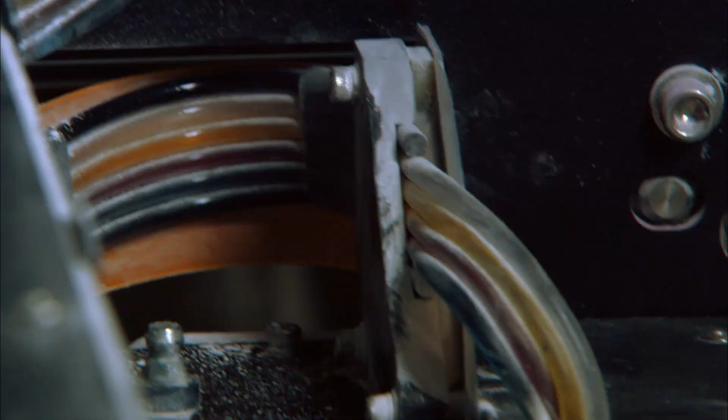The object's color is created by mixing 3 primaries of ink held in these reservoirs, that sends them out through 3 print heads. While a 4th carries clear binder fluid. This allows the machine to create white when necessary.

Here's a completed print job. It comes out as a thick block of powder, but watch as the powder is blown away. Buried inside, solid figures. The surrounding powder holds up the objects as they're being constructed. The excess stuff is reused for the next printing. Nothing is wasted.

Like an archaeologist wiping away the dust on an artifact, our newly printed subject is revealed. The figure gets a once-over by hand and is dunked in sealant and dried. One of these printers can crank out about 16 of these every 5 hours. Imagine how long it would take to make these by hand.

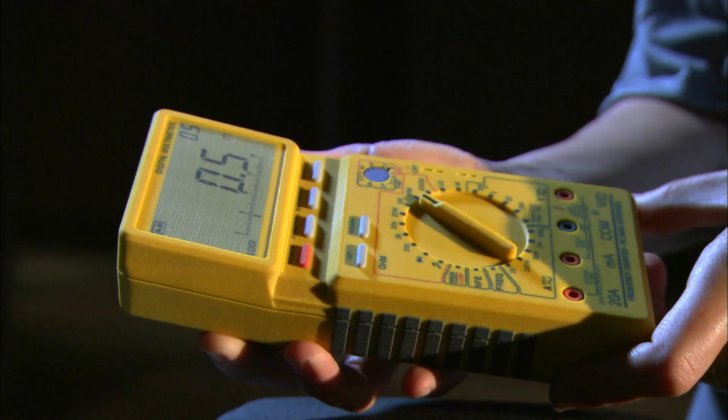Architects and engineers use this machine for everything, from scale models to machine prototypes with parts that move. If a regular printer is a painter, the 3D printer is a sculptor. And a version of this may be in your home soon enough. If you can imagine it, this machine can make it.